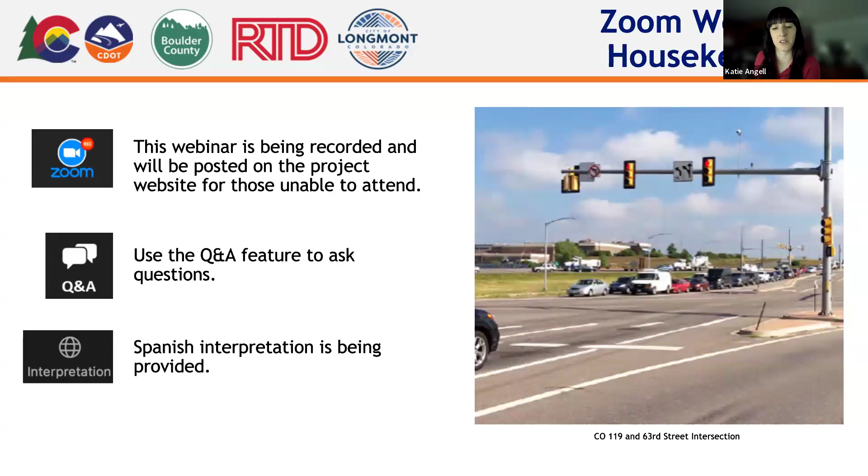At this point, I'll hand it over to Dan at CDOT. All right, thank you, Katie, and thank you again to everyone for joining us tonight. My name is Dan Marcucci. I'm the project director for CDOT on this project.

We'll go through the agenda. I'll start with an overview of the entire project. RTD will join us for a BRT update. Boulder County will join us for bikeway updates at 63rd and Fourmile Canyon Creek. And then I'll come back and walk through some construction impacts, and we'll have Q&A at the end.

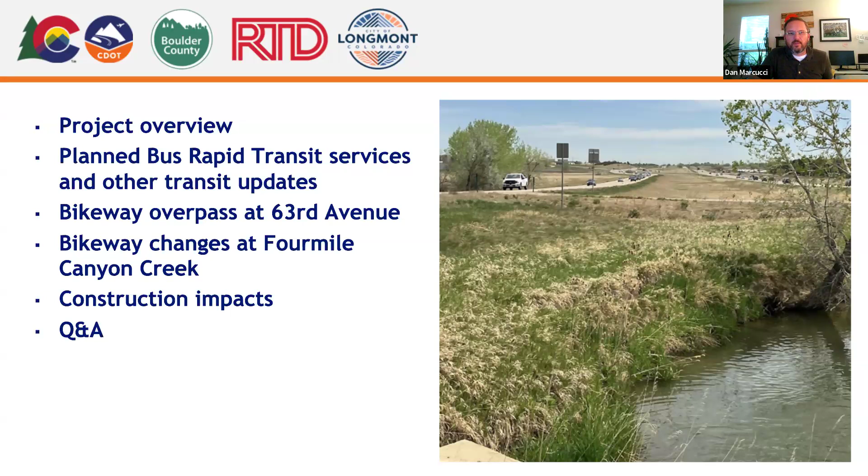Next slide. Again, so here's our project team. I'm Dan Marcucci with CDOT, the project director. You can see our CDOT team on the screen there, and then our Boulder County, RTD, and City of Longmont partners through...

Somebody's not seeing the slide, Katie, but I'll keep going until someone tells me to stop it. So there's our project team. Next slide.

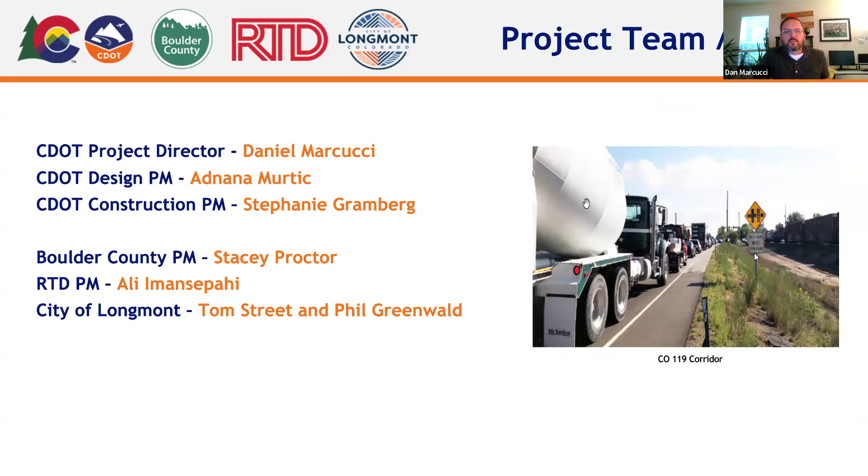Just rounding out the project team is our design team of Muller Engineering, our contractor Kraemer North America, and then our owner's representative is RS&H. They're a construction support firm doing our materials testing and inspection.

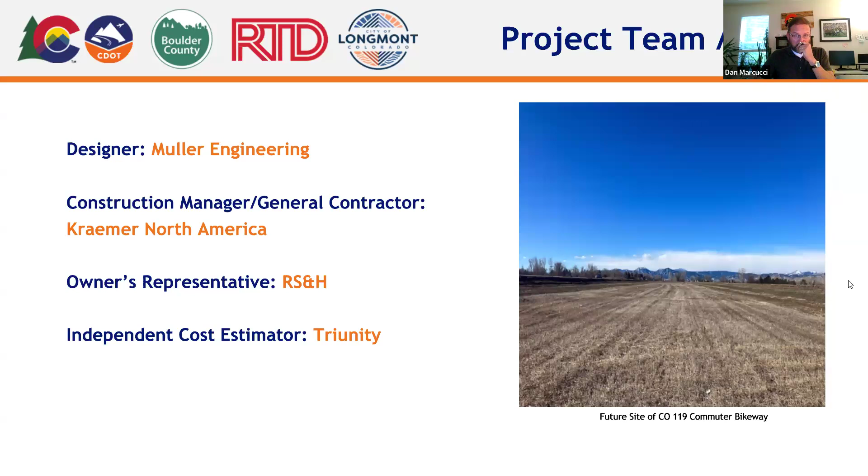Next slide. Here are our agencies and stakeholders that are involved. CDOT is the project owner. We have funding partners RTD, Boulder County, and the City of Longmont. And key stakeholders throughout the project have been and will be the City of Boulder, Commuting Solutions, and Boulder Chamber Transportation Connections.

We'll go back in time a little bit for some history on the project. Going back about 10 years to 2013, 2014, with the Northwest Area Mobility Study, or NAMS for short. This study identified several highways in the North area that were primed for transit expansion and enhancements. Really, the biggest priority identified was that 119 corridor between Boulder and Longmont. Next slide.

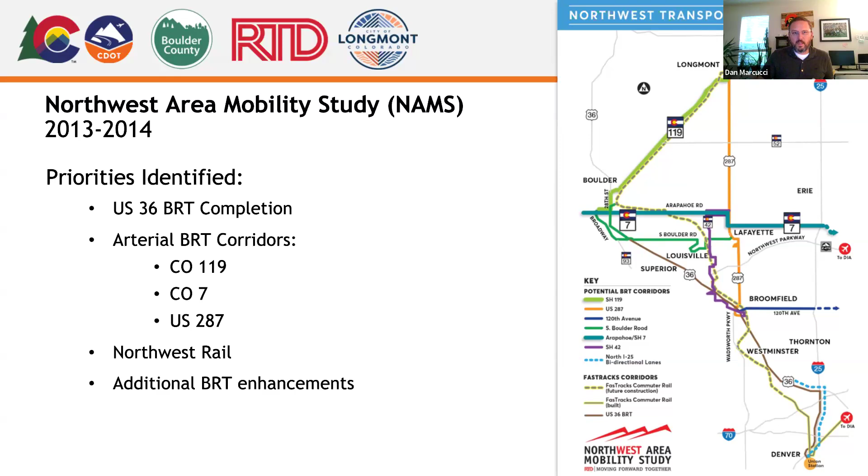RTD then took the next step in about 2018 or '19 with the BRT study, bus rapid transit study, that quickly evolved into a PEL, a planning and environmental linkage study. Really it's a planning level document that does a deep dive into environmental impacts to look for those types of red flags or showstoppers. This PEL effort did establish the vision for the corridor. It had a full slate of projects along the corridor from downtown Boulder to downtown Longmont and everything in between. It had a total cost estimated at 330 to 360 million.

For reference, our current project is about 165 million, so we're less than half of the way there to the total. But part of the PEL was setting out a plan to do this as funding became available, phasing in over time. So really, we're doing a big piece of it right now, and it's the first piece in a larger puzzle.

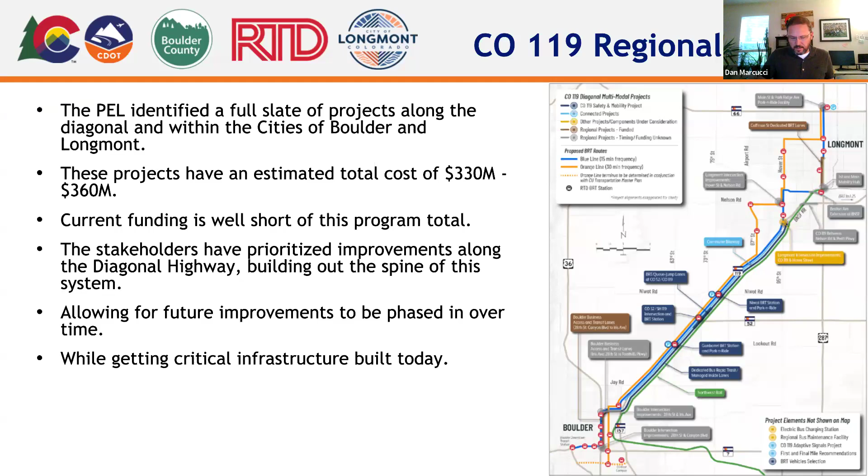Next slide. That takes us to our project directly, our project specifically on the diagonal, or the trunk as we call it. The number one challenge we faced on this job was safety. This corridor represents the highest crash corridor for motorists in Boulder County and the second highest crash corridor for bicyclists in Boulder County. So there's an immediate and long-term need for safety improvements. The numbers on the screen are a few years old now, and unfortunately they have gone up.

We do feel that our design will bring those numbers down in the future. We have improved standards we're designing to, better design. We project that over the next 20 years we can reduce almost 400 accidents in the corridor, and we expect to eliminate nearly all the bicycle accidents as we shift that cycle traffic to our new commuter bikeway in the median.

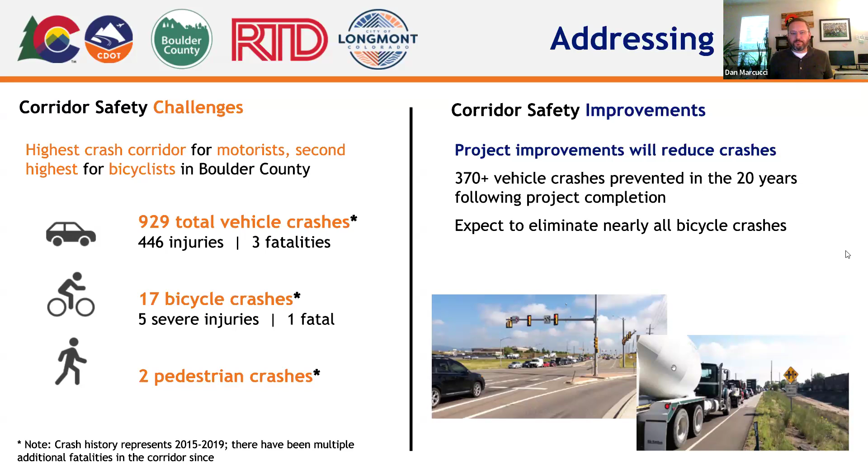Mobility was another challenge that we were trying to address on this project. Really, a main goal of this project was mobility improvement. Some of the challenges we faced were no direct bikeway connection across the corridor. I'll get into details, but we are going to implement a commuter bikeway down the median from Boulder to Longmont.

Bus transit, the challenge there was the Bolt service can be slow and it can be unreliable at times. So to address that, we're implementing a new BRT system that will cut those transit times in half and increase our ridership significantly.

Finally, traffic is ever increasing. We anticipate a 25% increase in traffic by 2040, and we know that we can't necessarily build our way out of that congestion. So we're trying to use smart growth, encouraging mode shifting to the bus or to the bikeway, and also trying to use technology to help manage our traffic at the intersections.

We're implementing adaptive signals along the corridor, which can learn traffic patterns and adjust automatically, and can be adjusted from afar too, more easily.

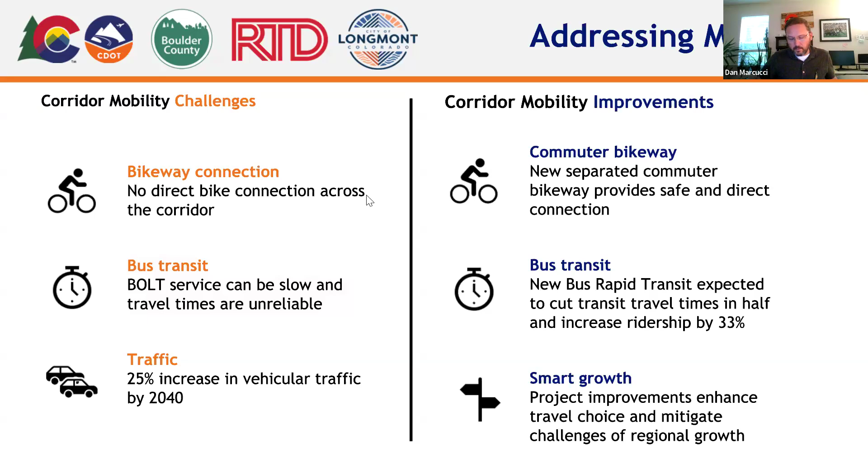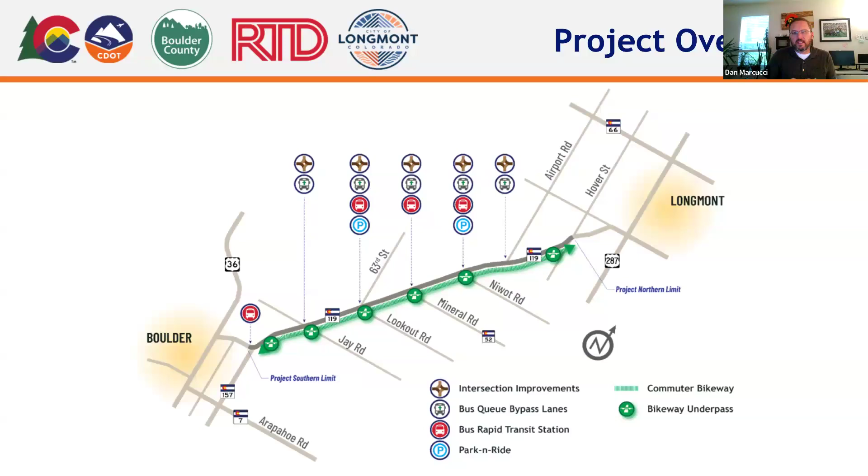I'll go into a list here on the next slide. So here are the major features of work. We'll go through with graphics here in a minute, so bear with me as I just go through the list and we'll talk more specifically about them.

Highway 52 and 119 will represent a near complete reconstruction, splitting out that intersection to make it similar to 63rd and Niwot. Airport Road will have operational reconfigurations that I'll get into. Hover Street and 119 represents a major area of construction with a partial grade separation.

We'll be adding queue bypass lanes at all the intersections and general intersection improvements at all the major signalized intersections, a new park and ride at 63rd, and an expanded park and ride at Niwot Road.

New BRT stations at 47th, 63rd, Highway 52, and Niwot Road. We are also making some safety improvements at unsignalized intersections. And our commuter bikeway, again stretching from Boulder to Longmont, with grade separated crossings at those major intersections.

And then our ITS improvements: a fiber backbone along the entire corridor, or at least most of it, transit signal priority to let buses get ahead of the queues at the signals, and then the adaptive signals that I mentioned earlier.

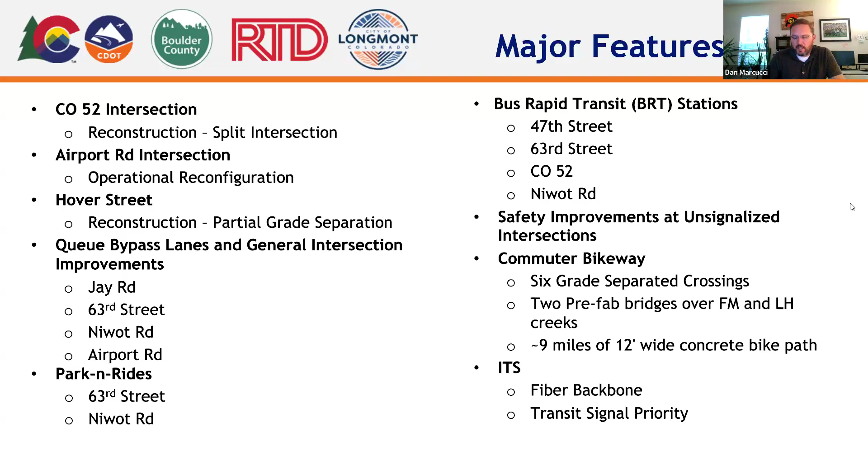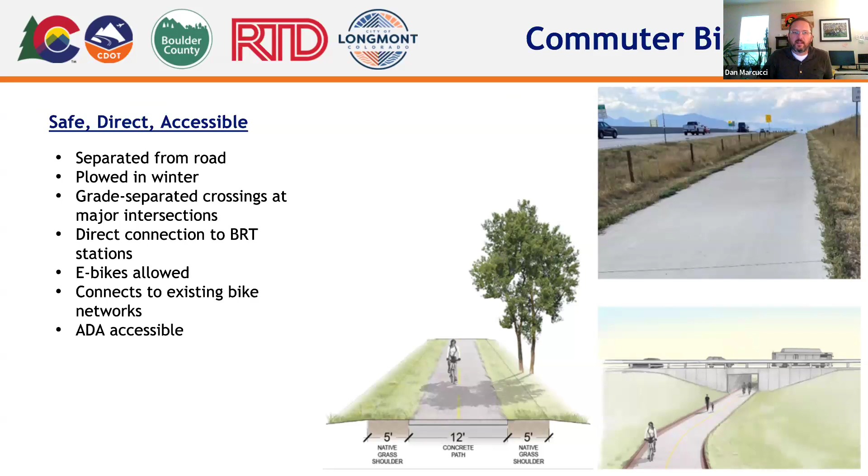Now we'll get into specifics, a little more specific. Here's our commuter bikeway, talked about it several times. It's designed to be safe, direct, and accessible. It's separated from the road, it's concrete, it's plowed in the winter. Like I mentioned, grade separated at major intersections. It will have direct connections to BRT stations and existing bike networks, and it's designed to be used by e-bikes and is ADA accessible.

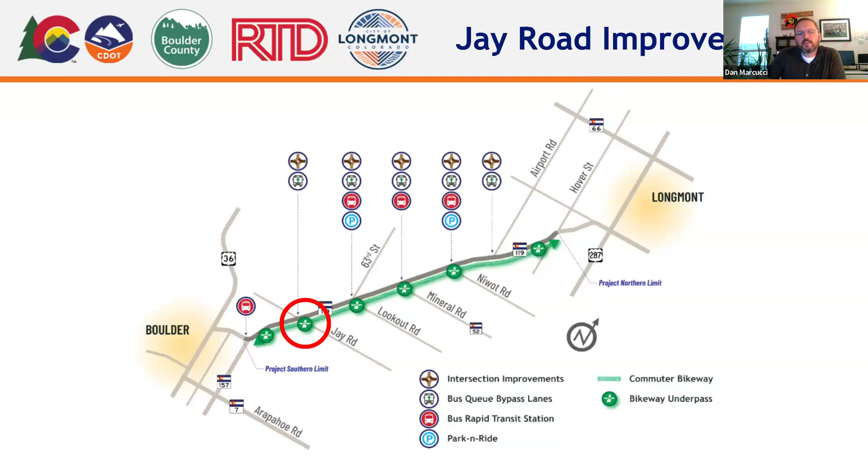Next slide. Now we can walk along the corridor, intersection by intersection. So the first one is Jay Road.

Next slide. The improvements here are shown in black. On these next few slides, improvements will be mostly in black on the roadway. Queue bypass lanes there in both directions, and pushing out those existing left turns, so a little bit of extra widening. And our commuter bikeway down the center with an underpass here at Jay Road.

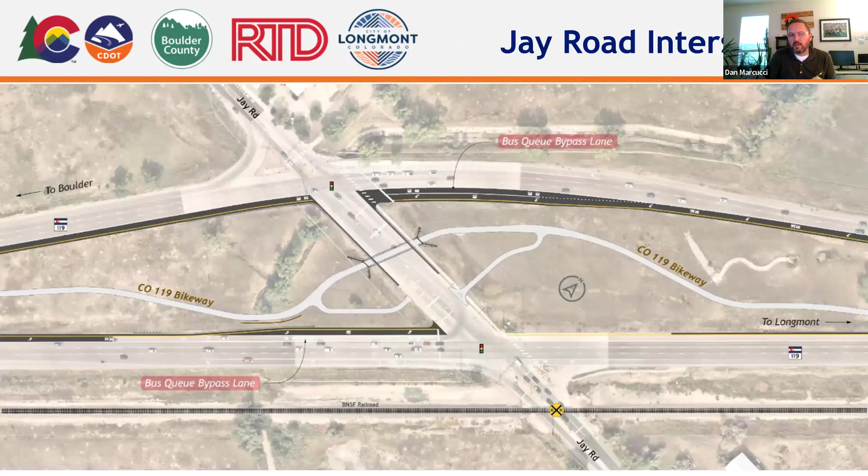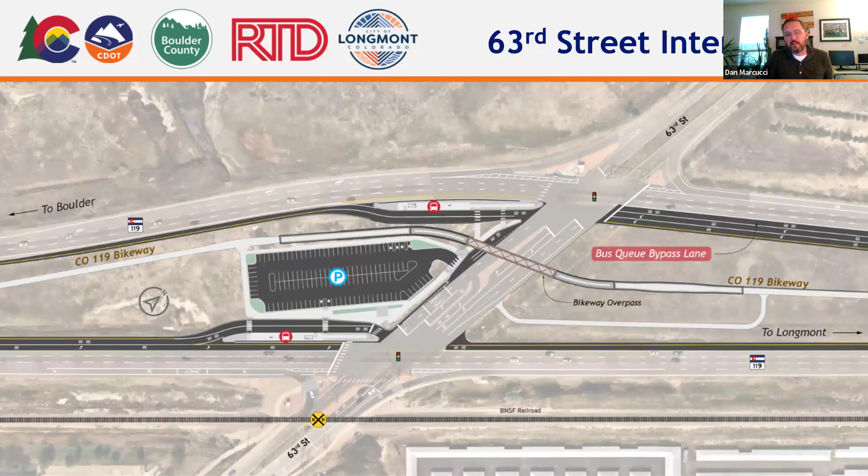Next slide. Moving up to 63rd, go ahead to the next one. Major improvements here, again with improvements shown in black: queue bypass lanes, transit stops, a large park and ride shown there, and our bikeway again shown down the median with an overpass in this location.

Next slide. Highway 52 is next. Go ahead to the next one.

You can go back to one here.

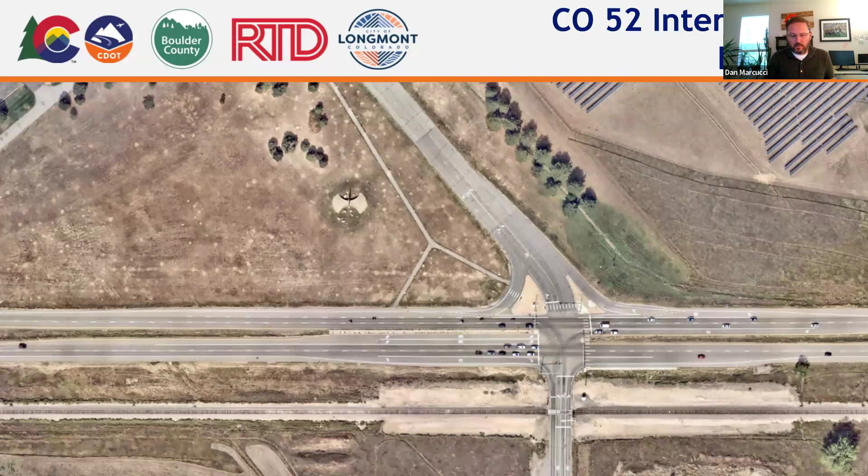Our next intersection is Highway 52 and 119. This slide shows the existing configuration. Many of you are probably familiar with that. Keep that in mind as we move to the next slide.

Improvements again in black. The intersection shifts to the south a little bit. A couple benefits: we think the intersection works better in this configuration, and we've modeled it to work better, with a little more independent control on the signals.

Another key benefit is building a lot of the improvements offline, outside of traffic, which will at least reduce some of the impacts to the traveling public. Not completely eliminate, but reduce some of the construction impacts as we build the southbound 119 and 52 offline. Again, the same type of improvements: queue bypass lanes, transit stops, and the bikeway in the middle with an underpass at this location.

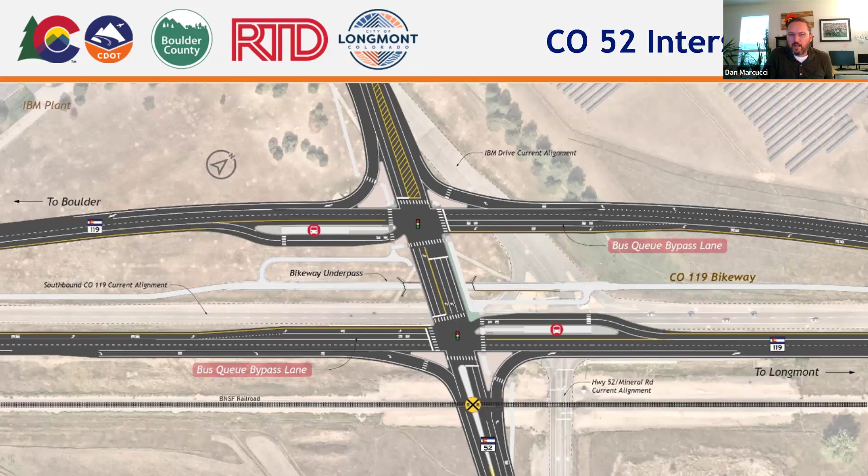Next slide, Niwot Road. Similar improvements here: queue bypass, transit stops, and an expanded park and ride. These park and rides are likely to be phased in over a period of time.

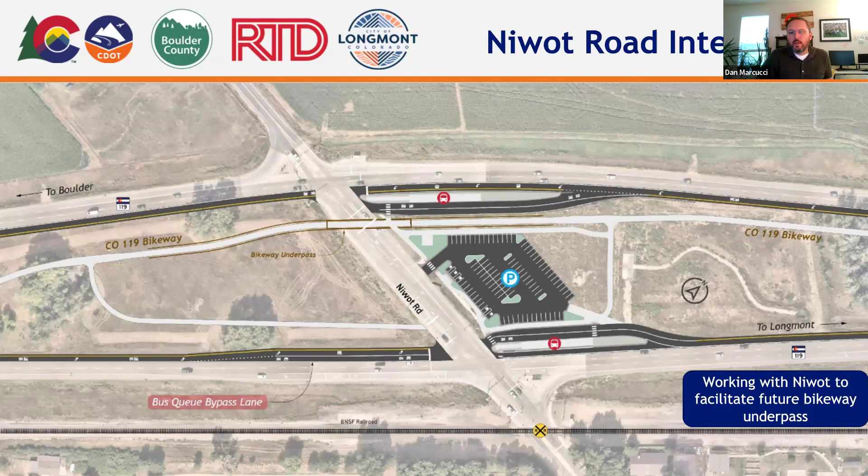We are also working with Boulder County and Niwot. It's not part of our direct project, but as we design our project, we're making sure we keep in mind the wishes for a potential future bikeway connection into Niwot under 119 there. So we're working to make sure our design at least doesn't preclude something there in the future.

Next slide. Airport Road is the next one. It's a little more tricky than some of the others. The current configuration, the connection through the median, is currently two lanes of traffic. For safety reasons, and operations too, we're going to change that to one-way northbound.

The southbound movement trying to make the left-hand turn onto northbound 119 was a high accident rate movement there, and we're potentially making that worse with more volume coming through.

The existing traffic that goes southbound at 119 is going to have to go down to Oxford or 83rd to make a big Michigan left, a U-turn kind of movement, to head toward Longmont or to get over to Ogallala.

At Ogallala, we originally had a right-in, right-out. We eventually were going to restrict this movement from Ogallala to Airport, but based on feedback from previous meetings, we've added this movement back in, and we feel we can do that movement fairly safely.

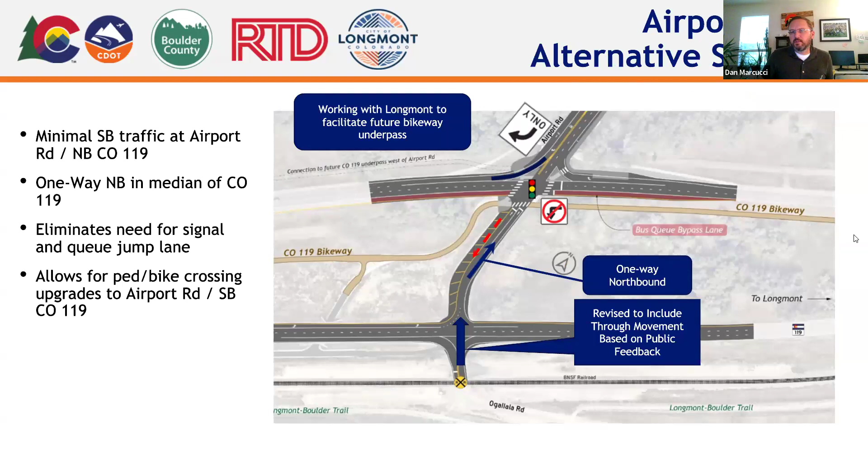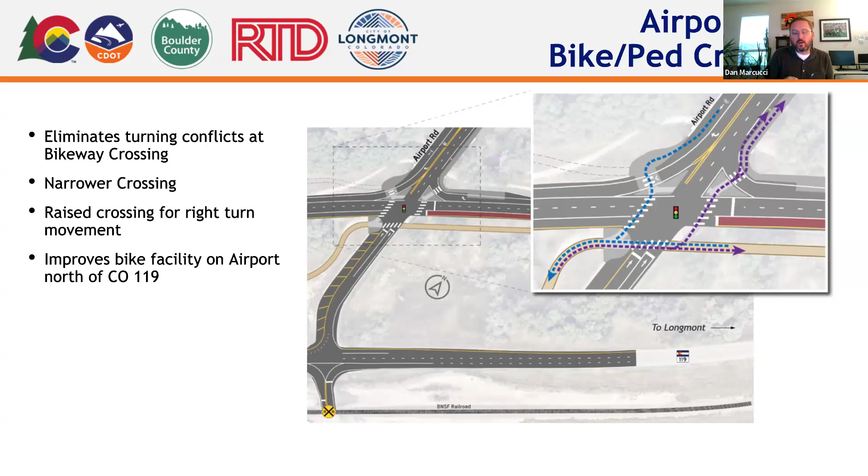On the other side of the median there, closer to the creek, another reason to make the change to just one direction is that the bikeway crossing will only have to look one direction, so it'll be safer crossing for people on the commuter bikeway. We'll also be making improvements on the turns closer to the creek, adding raised crosswalks to provide safer crossing and highlight the fact that there's a crossing there, to get cyclists to cross as safely as possible.

Next slide, Hover Street. Hover Street is another big one. It is farther behind than the rest of the corridor. The improvements there are based on previous work done by Longmont, based off the Southwest Longmont operations study. This design in the bottom right-hand part of the screen was used to secure a federal RAISE grant in the form of $25 million for this intersection and other parts of the corridor. It originally took southbound, or Boulder-bound, 119 under Hover.

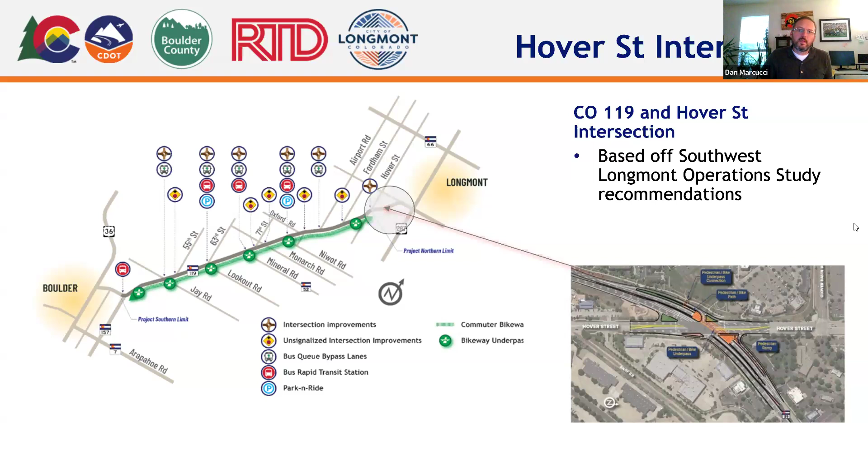As we've dug into the design a little bit more, we did find some fatal flaws with that underpass design, unfortunately, namely the existing pedestrian underpass near Oskar Blues. We simply couldn't get the underpass back up to grade in time without rebuilding the entire intersection.

So we went through an alternatives analysis, and now we're looking at taking that Boulder-bound 119 over Hover in this location. Longmont is part of this conversation at the design table with us. We're also investigating the exact location for a pedestrian crossing north of the intersection, and we don't know for sure if it's over or under on that one, but we're still looking for major improvements here at this intersection.

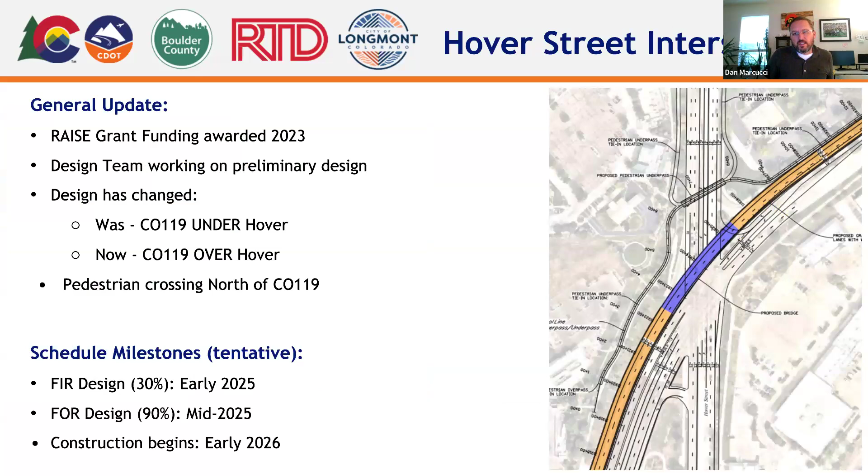The schedule for this is preliminary design in early '25, final design around mid-'25, and construction beginning in early '26. Now we move into the unsignalized intersection improvements, starting with 55th.

On the left of the screen, you see our biggest conflict points: southbound 55th trying to cross southbound 119, and vice versa, northbound 55th trying to cross northbound 119. Those acute angles cause these movements to have a higher rate of accidents than expected. Not a great number of accidents, but based on the volume here, the rate of accidents was higher than should be expected.

We originally looked at closing this median connection altogether, getting rid of the 55th connection and doing right-in, right-outs. But after feedback from the community, and taking a deeper dive into the design, we've determined we can achieve the safety improvements by simply making it a one-way median connection.

So there'll be a northbound one-way direction. Southbound will have to go out and around. The Waterstone neighborhood up there, their travel to and from Boulder will be largely unchanged based on this design.

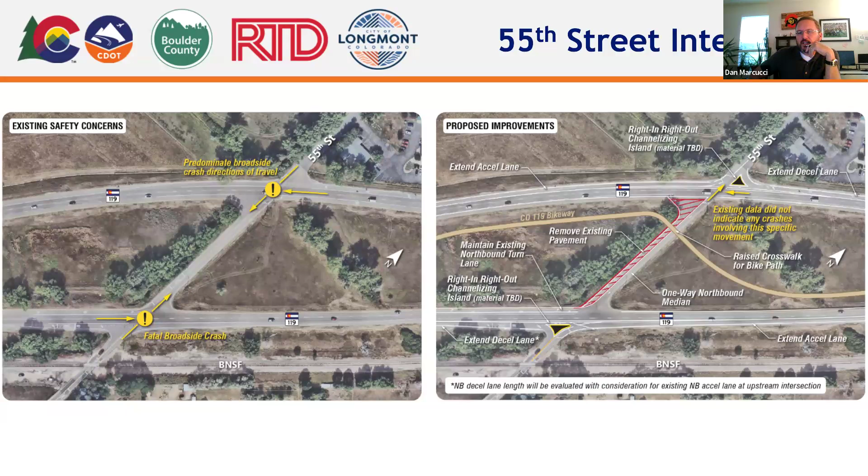If those folks north of there want to go back to Niwot, you can go to the next slide. They will have to go down to Jay Road, shown here in red, and make a minor out-of-direction travel to get turned back around, going the right direction. We do feel that will be a much safer movement and worth the out-of-direction travel.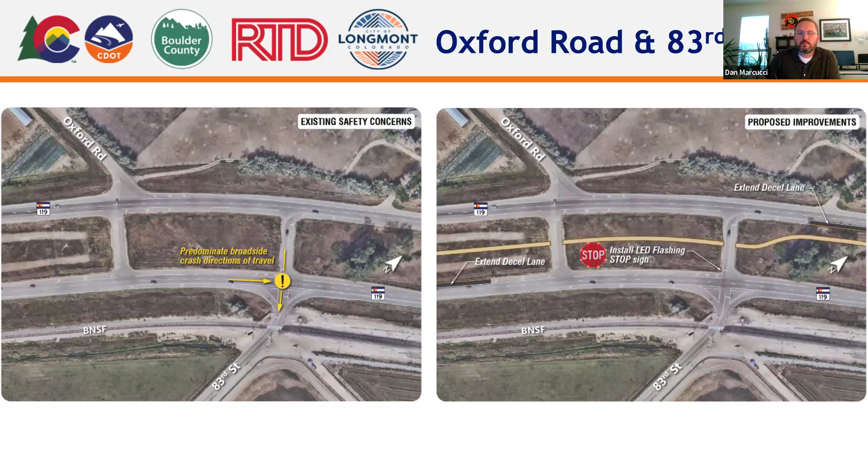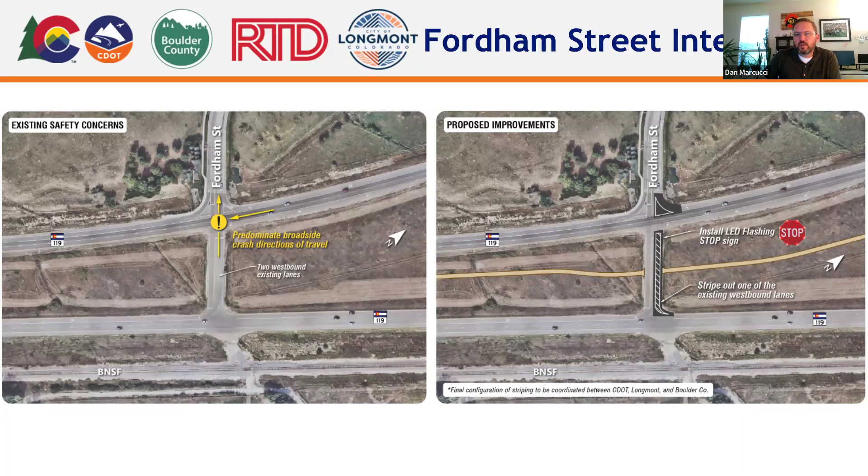The next slide is Fordham. Fordham Street really is a paint restriping effort here. It's a 2-lane westbound connection there. We'll remove that and replace it with a 1-lane each direction configuration to try to eliminate any confusion there trying to cross northbound. And with that, I think that's it for the roadway improvements specifically.

I'll hand it over to Ali with RTD. Thank you, Dan. This is Ali Imansepahi, project manager for RTD on this project.

Next slide, please. So this is another version of the project overview slide that Dan showed earlier. The focus here is, so what was shown was the safety and mobility bikeway project, which is the trunk portion of the project, and what RTD will be doing, implementing 2 patterns, the orange and blue patterns of the BRT route, that extend beyond the limits of the safety, mobility, and bikeway project, going into the cities of Boulder and Longmont. The red circles that you see are the planned BRT stops within those cities, based on the planning and environmental linkages study that was finalized in 2019. And those stops were planned based on lots of discussions with our partners on this project, and were identified to be at the locations that you see.

A small caveat down below where it says CU East Campus: currently there is a study underway by the city of Boulder to see if the orange pattern could be slightly rerouted on the southern terminus, if you will, to pick up CU main campus as well.

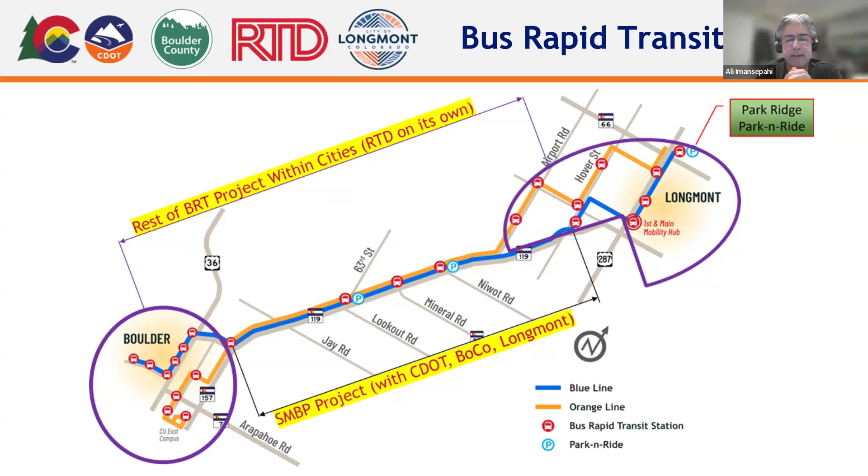And with that, I'm going to hand it over to my colleague Natalie to talk about the timeline of the BRT project and service planning. Thank you, Ali. Good evening, everyone. My name is Nataly Huntlos. I am the Senior Service Planner and Scheduler for RTD's North team within Service Development, and I am the project manager for the service planning and scheduling part of this project. Ali is the engineering project manager.

Wanted to show you this timeline so that you can get an idea of how many projects we're coordinating with our partners in order to complete the overall bus rapid transit project. As you can see, it's quite extensive. For RTD, there is the BRT design, the service development design, and then the coordinated construction between both teams. City of Boulder also has several projects that will help make this BRT project much more successful. I don't know if anybody from City of Boulder is on and wants to fill in on any of these, but otherwise we'll just go next slide.

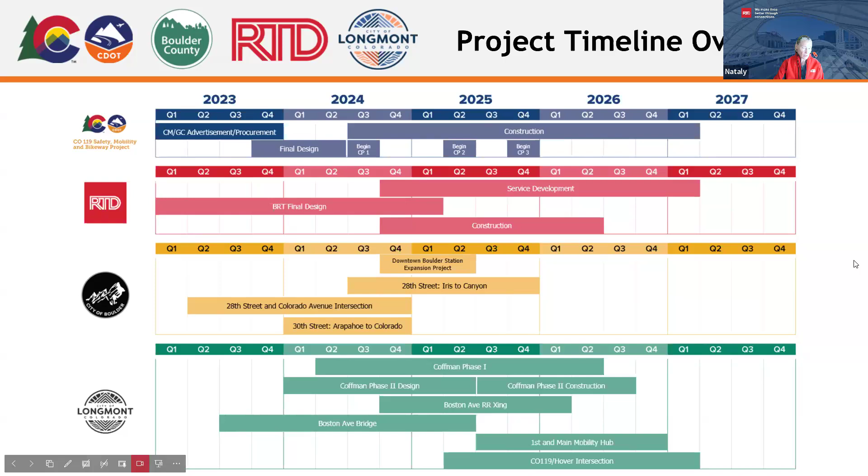This next slide - Ali mentioned this just a little bit. We have two patterns that emerged out of the PEL. The blue pattern, which is pretty much what the Bolt pattern is currently, will be the main pattern operating from the north end of Longmont. Weekdays, it's currently set to start operations at 30 minutes all day bi-directional for opening day. Saturday, Sunday, holiday, 60 minutes all day bi-directional. Depending on resources which we might have available, we can look and see. We will have conversations with our stakeholders as we move forward.

We'll figure out if we can increase that frequency for opening day. The orange pattern is pretty much what Route J used to operate. Route J currently is still suspended, but it is to come back within the Highway 119 BRT. It would also operate from the north end of Longmont. And then within Boulder, currently, as Ali mentioned, that routing is under review through a study with the City of Boulder, but it is set to operate weekdays at 30-minute peak frequency bi-directional. Again, if anybody from City of Boulder is on and they want to fill in because it is their study, let us know. Guys, next slide.

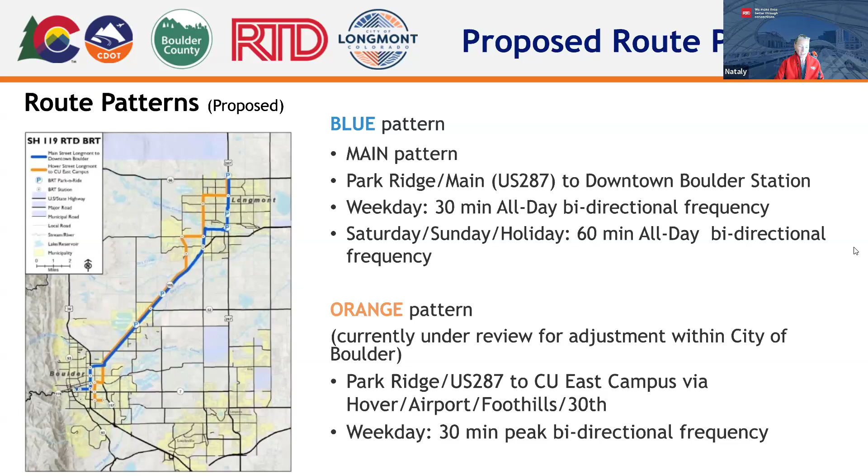Just to let you know what our next steps are as we move forward from the service development side. We're looking to finalize the orange route pattern in September with the stakeholders. This is led by City of Boulder. Then internal and external local agencies and stakeholder meetings will occur between November 24 into about March of 25. That allows us to identify every detail that we want to move forward with into public outreach as it comes to service span, service levels, the stations, the stops, the routings, frequencies, all of that.

Then looking to have the public outreach along the corridor in late spring, early summer of 2025. With input then received from the public, we will go ahead and draft the service plan in fall of 2025. We will reevaluate that service plan based on resources available for opening day in late spring, early summer 2026. The final service plan will be put together and put through public process in fall of 2026, so that we can put it through the process with the February 2027 public hearings for a May 2027 service change implementation.

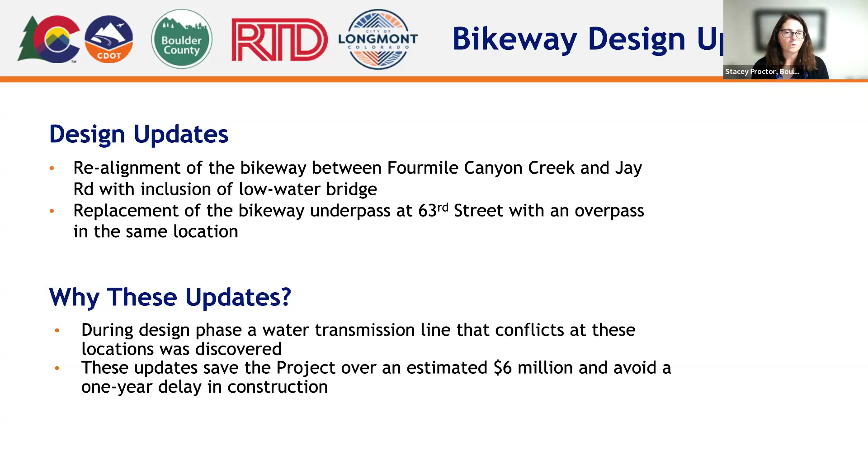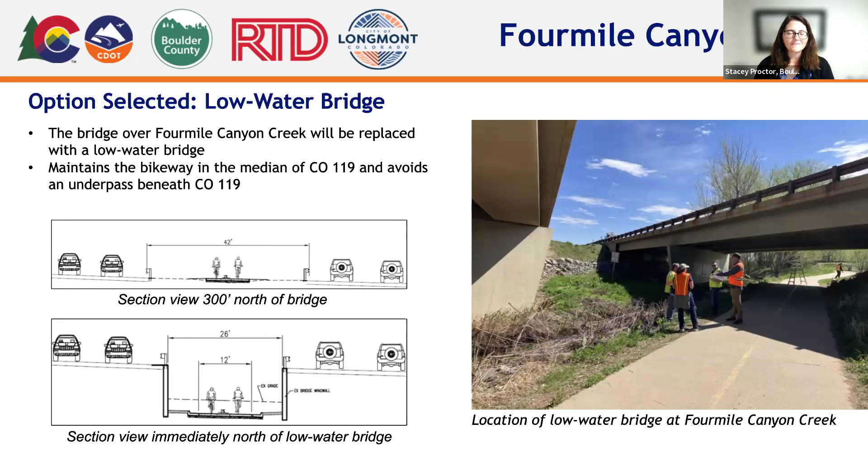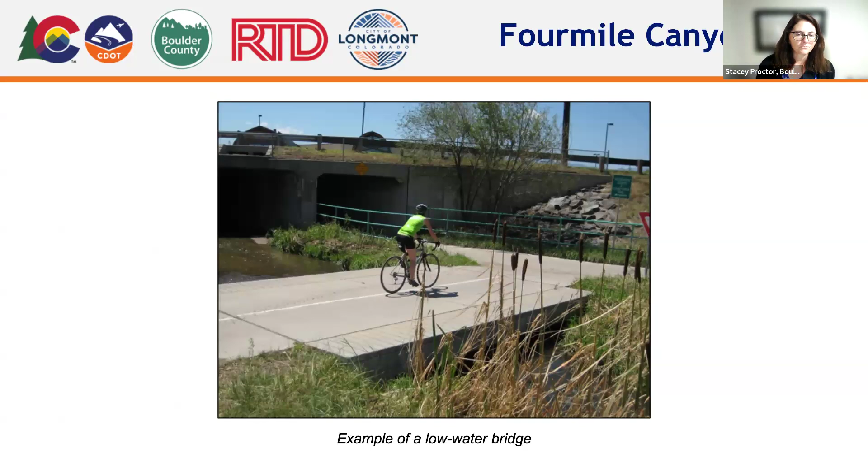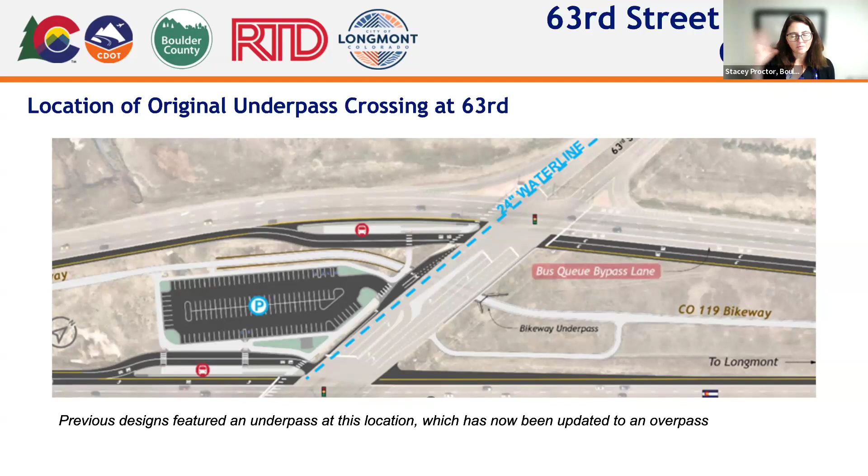For the 63rd Street bikeway overpass, as you can see here, the 24-inch water line crosses directly over where we had planned to do an underpass. So we're moving forward with an overpass instead, and it'll be the same footprint or very similar footprint to what the underpass was, just above ground instead of underground.

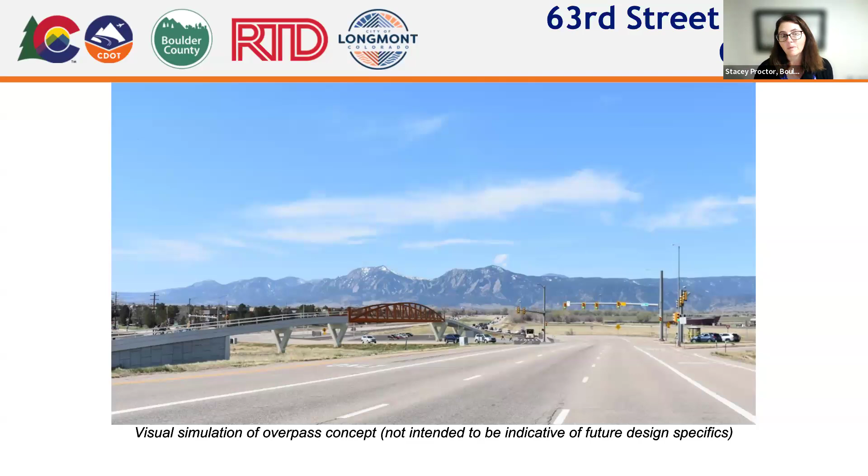This is the current view if you're going south on 119, approaching 63rd, and this is a simulation of an overpass concept. It's not a specific design by any means, just trying to get an idea of what an overpass would look and feel like in this area. As we get to the voting portion, it might help to look at this picture and think through what you'd like the bikeway overpass to look like.

We really want the bikeway overpass to look great in addition to being functional and safe, so we're going to work with a landscape architect to come up with 3 design concepts. Once we get those, we'll come back to the community to get input and decide what to move forward with. But first, we wanted to take the opportunity tonight to get some initial direction from people to see what you might be interested in seeing, so it can help shape those 3 design concepts. So this is our first question, looking at what we can use as a theme for the overpass.

In a minute, the poll question will pop up, but I wanted to talk about the theme options we're considering. You can see them here in this photo. Just a note, these are just examples of a style of a bridge or overpass, not a specific example of something we're specifically considering. So I'll talk through a little bit more what each of these mean.

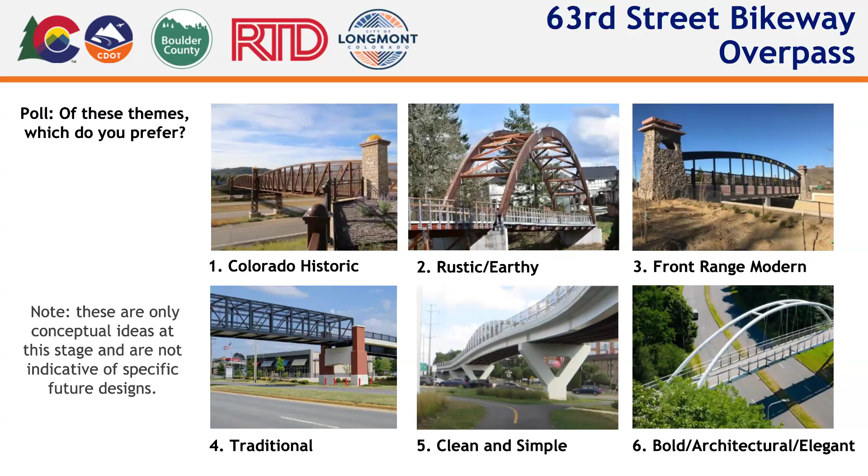Great, yes, thank you so much for participating in that. As I mentioned, we have an open survey with these questions, similar questions to this, plus some others. And then we'll come up with 3 design concepts based on those, and there'll be additional opportunities for input.

And then the second poll that we have here, you can see the questions on the screen now, but there are trade-offs with anything, and kind of goals or directions that we can head. So this is maybe a little bit more theoretical question, but we're going to ask you to rank these potential goals for the bikeway overpass. So the first would be integration with surroundings.

So this would be if you really think it's important that the bikeway should complement and enhance its surroundings and sort of blend in with nearby features. There's also a second option, landmark creation, making the bikeway overpass designed to create a landmark or gateway feature, something distinctive and recognizable.

The third would be cultural expression, that the bikeway overpass should reflect the culture, history, or identity through design elements, decorations, or public art. Striking design, that the overpass should make a statement and really stand out. And then there's also focus on functionality, that I don't have a preference for how the overpass looks as long as it's functional.

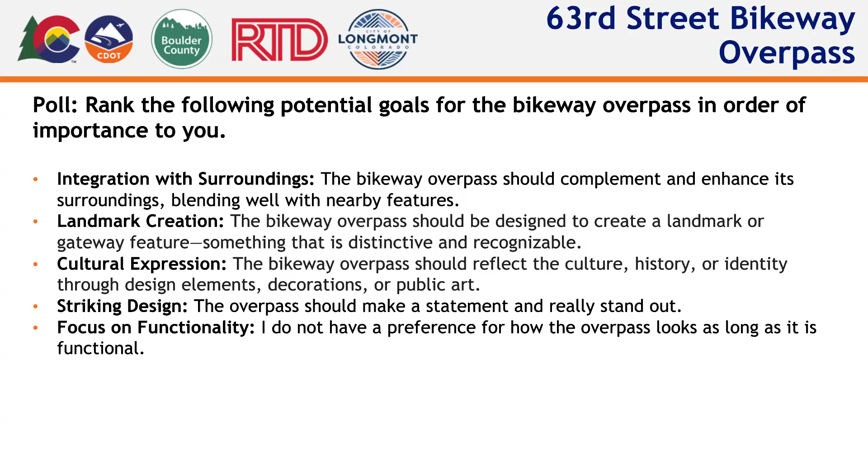Okay, so these are our results. It looks like integration with surroundings was the most important. Coming in close to second was focus on functionality, and then cultural expression. You could see the rest here—less important to low importance as well. Okay, this is really helpful. I really appreciate everyone's input on this, and it's great to see where people are thinking.

You can go to the next slide. Yeah, just thank you so much for your input. Happy to answer any questions about these changes to the bikeway. As I've mentioned, we're developing three design concepts, and we'll be coming back for another round of feedback in the fall, likely an in-person public meeting. Feel free to take the survey, send that survey to your friends, share it as much as you can. We're trying to get responses in the next few days so that we can start moving forward with getting the concepts together. So thanks, and I think that's me turning it back to Dan.

All right, thanks. We'll go through construction impacts here. But first, project funding—I'm going to go through this one real fast. This project is a result of a very large effort in trying to secure all the funding that we needed. Many people, many groups have contributed to the project. CDOT, RTD, Boulder County, and Longmont all have direct funds contributed to the project. Boulder County was responsible for most, if not all, of the DRCOG federal grants.

DRCOG distributes federal money across the state through grant opportunities, so Boulder County was able to get those for us. We had our RAISE grant from the federal government of $25 million, and then another CDOT grant for $2 million. All told, we're at $165 million in total funding, and our estimated construction costs right now are $165 million. So we're right on budget, and working to maintain that budget still at this time—maybe some creative solutions still to come to try to stay within that budget.

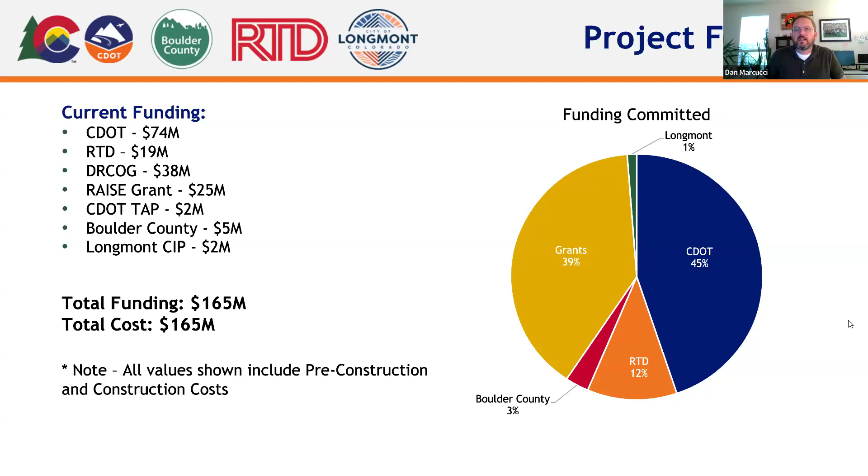So now we can move on to the next slide and the construction update. The timeline for construction is coming up soon. We're looking hopefully in September, a month from now, into maybe early October, to start a majority of the work along the corridor.

Improvements at J Road, some minor improvements at 63rd, not the big project, but the full job at 52nd at Niwot, the underpass at the north end of the project getting into Longmont, being back out of the median, and then work at those unsignalized intersections, as well as the bikeway itself connecting to many of these points and in between. Then before summer, let's say spring of '25, we're going to start 63rd in earnest, the full build out there and the connection at Fourmile Canyon Creek.

And then Hover itself should begin construction hopefully in early '26, with an estimated total construction of 24 to 30 months, targeting the end of '26 as our wrap up date, or maybe early '27.

We will have plenty of traditional road or lane closures and lane shifts as part of any regular construction project. But a couple of closures we wanted to bring your attention to were for the underpass construction at J Road and at Niwot Road.